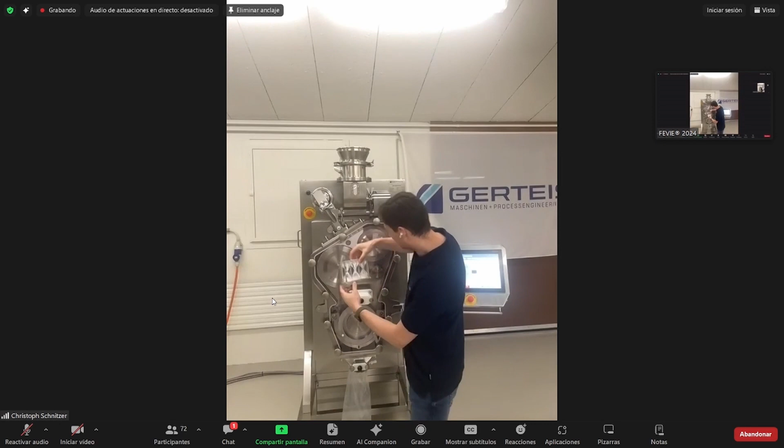I hope you can see it in the camera. I turn it now, I do it two times. So you see here in the middle, this one was going very fast down. This here was slower, and this is not going down at all, or very very badly. And then we come already to the topic, because in this thing here, you see, this is only mixed dry powder, ungranulated, and as you can see, the flowability is not very good. Whereas, and I do it again, in the one in the middle, you see that the flowability is very good because it's a granule, it's not only a dried powder.

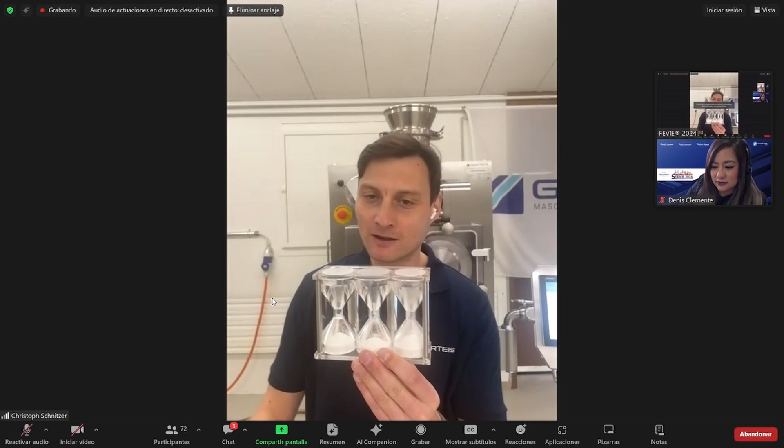And this granule is much better flowing than in the tablet press forms later, and that's why we are doing it. So with our process, you can say we make the homework, or make it easier for the tablet press to produce nice tablets, because we enhance the flowability a lot of this dried powder for solid dosage for tablet making afterwards. So this explains what we are doing.

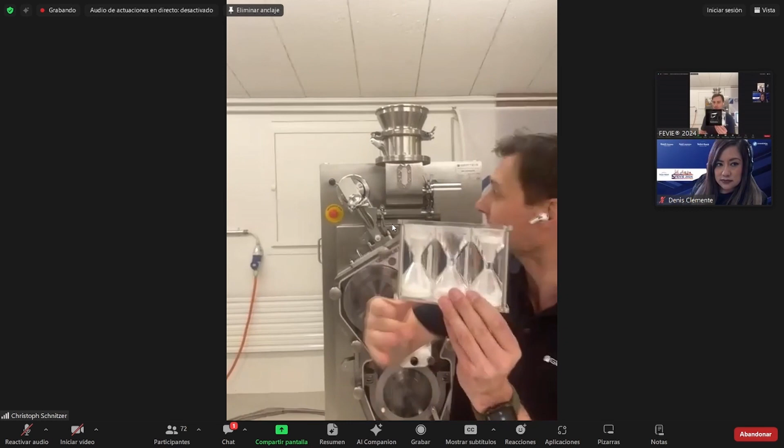The input in our machine is dry, not good flowing powder, and the output will be later the granules, which are flowing well. Now, with this, we come already to the machine itself.

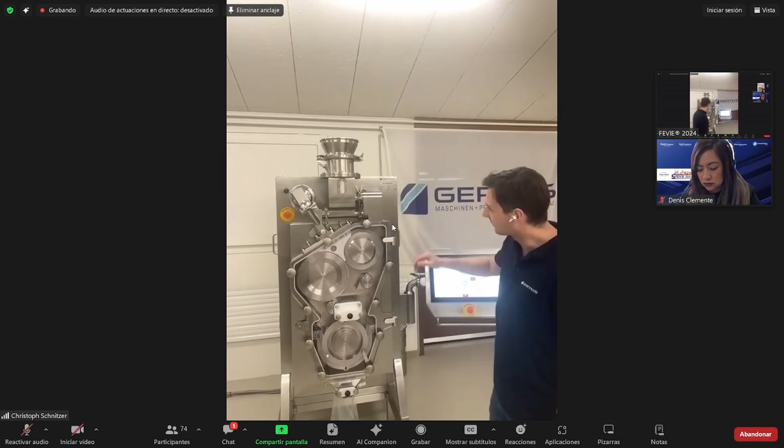This is a typical roller compactor, it's called our Mini Pactor. It's, let's say, small size for smaller batches for research, but also for smaller scale production.

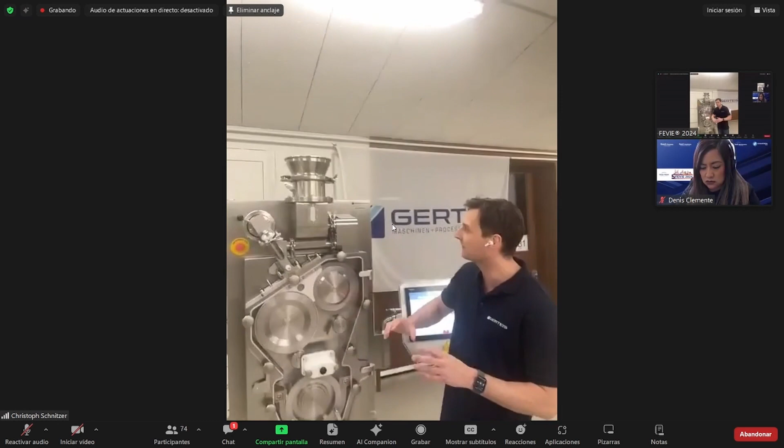So typically, this machine is built up as such. You have the powder inlet, you put in the mixed dry powder into our machine. You do it via IBC or via vacuum transfer system.

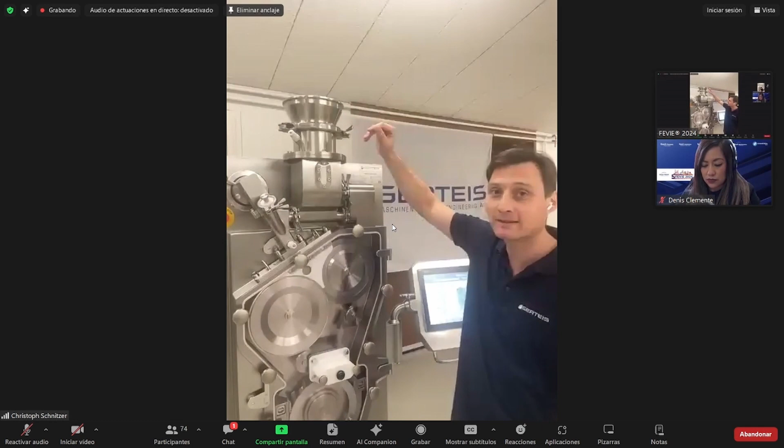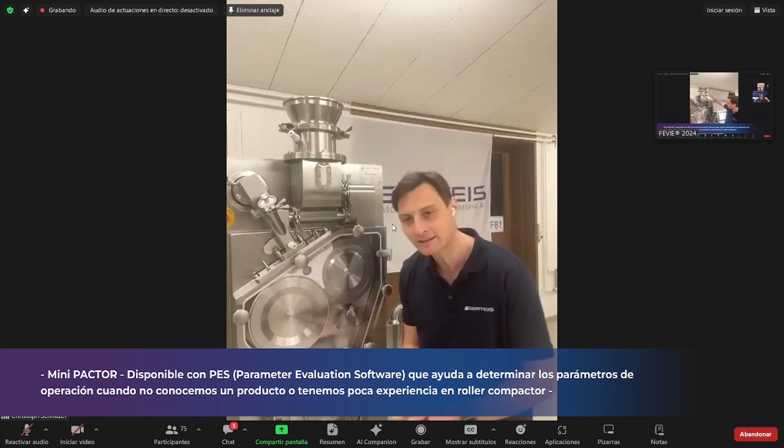Depends on how your system is built up. The powder comes into the machine, and we have an agitator which helps so the powder isn't blocked in the container, preventing blockage and helping the powder fall down. Then we have a screwing system, a feeding and tamping auger, which direct the powder into the compaction area. The main process of our machine is the compaction between the rollers.

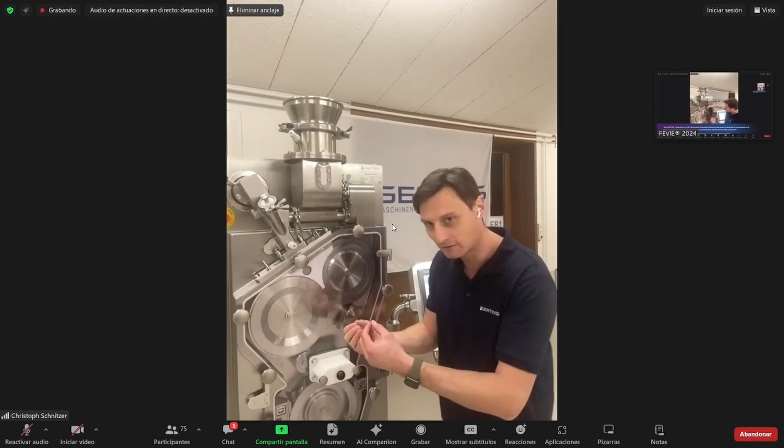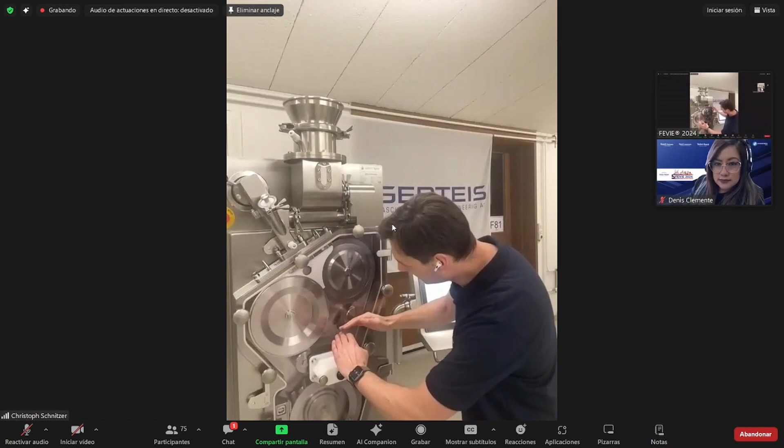That's where we make the quality of the product. So in here we make a ribbon, produced between these rollers. They are turning, you'll see it later in the process. We produce an intermediate product, the ribbon, and then we have an oscillating mill down here, a granulator, which granulates the ribbon into granules.

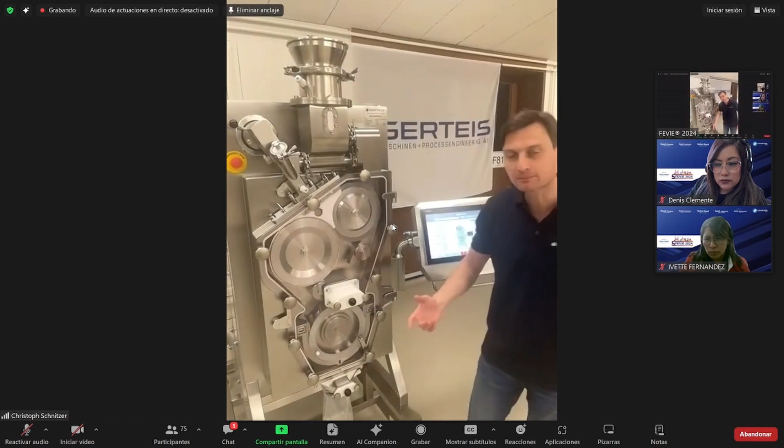Which you later take out of this outlet here. This is the outlet funnel, and from here you can connect the IBC or the vacuum transfer system, depending on your needs. Then you transfer it to the next process step, which is apparently tablet pressing, for example. So that's the general build-up.

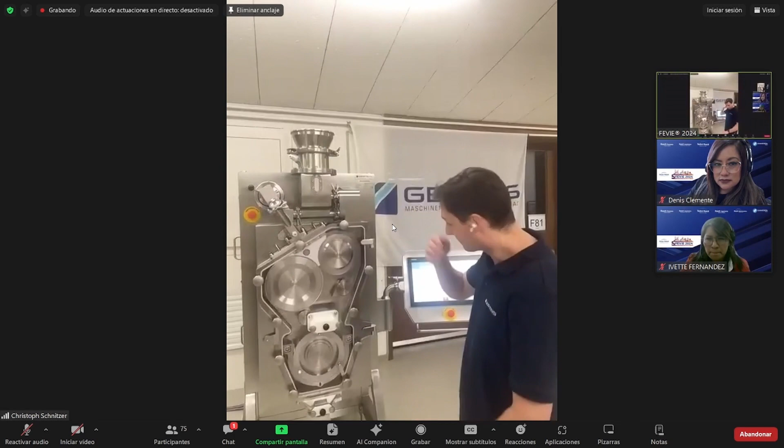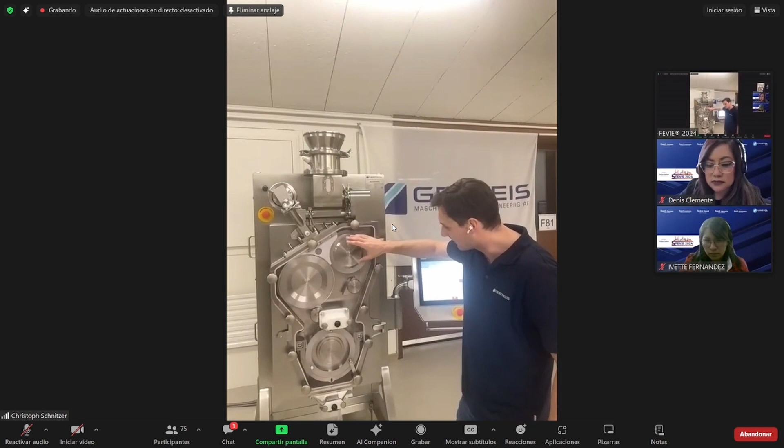So we have two sub-processes. One zone is the compaction, where the compaction of the material is done, the densification. And afterwards we have the second process step, which is the granulation.

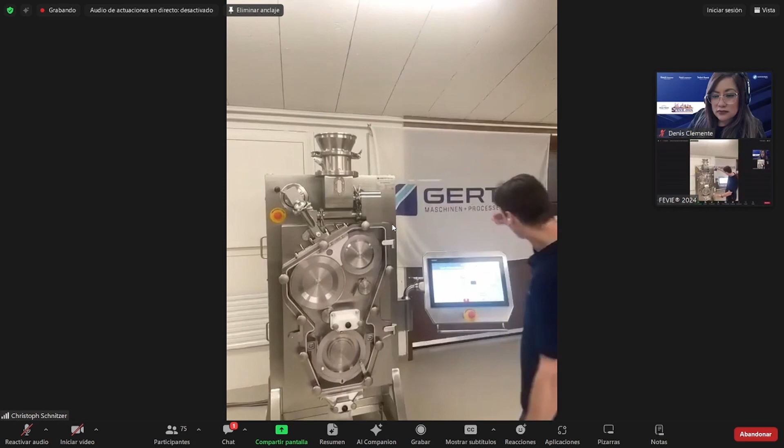So what else is around this machine? We have the process housing here, which is this size. And of course we also need an HMI to control the process, to change parameters, to control this process simply.

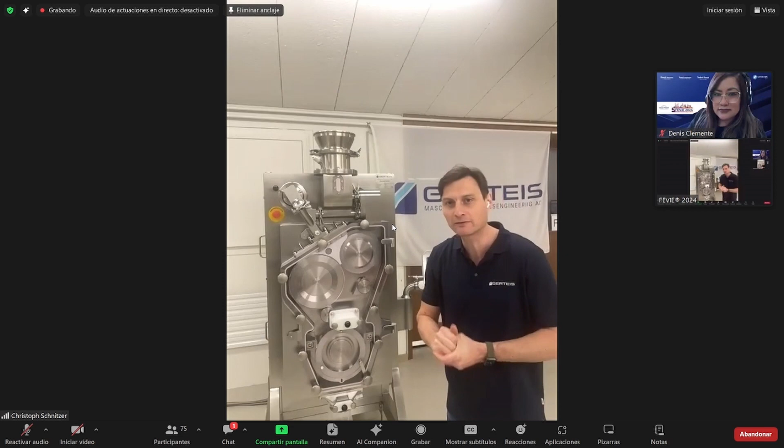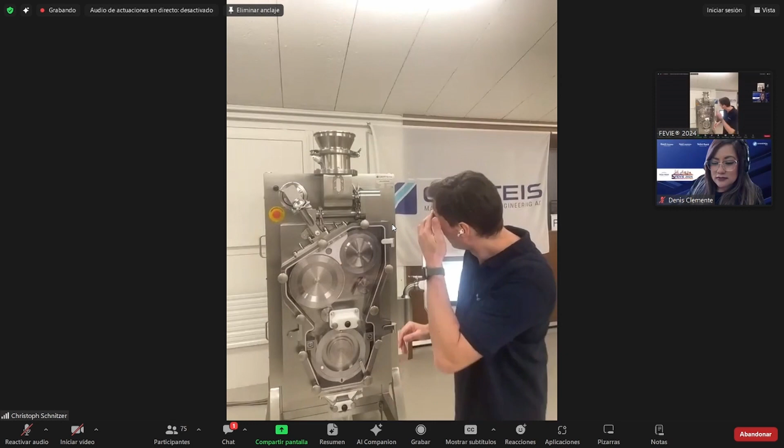And of course here you can also change the main parameters. Let me explain a bit more. What are the main parameters for our machine? Of course, you can adjust the press force between the rollers. The higher you increase the press force, the harder the product gets. You can also adjust the gap between the rollers, which also has an influence on the hardness of the product, but also on the output. The bigger the gap you adjust, the more output you will generate.

So this combination of press force and gap determines the characteristics of your powder later - how hard it's densified, how hard the granules are, or if they're a bit softer. So this is all done within this chamber, let's say.

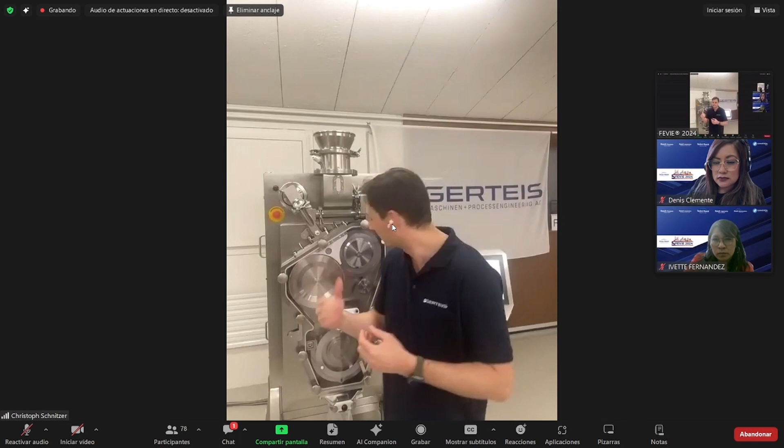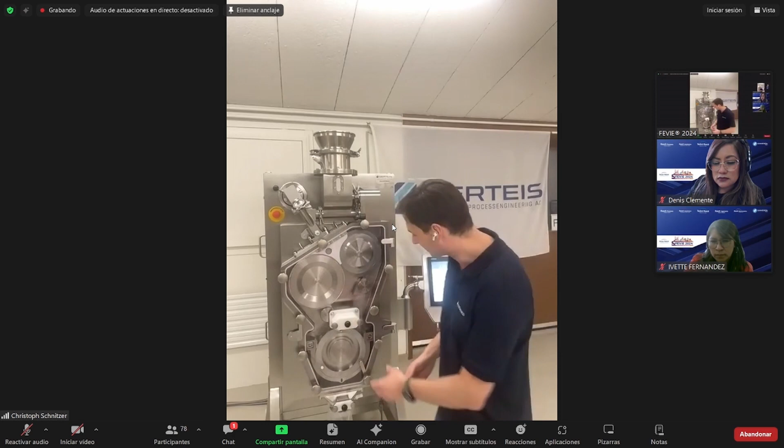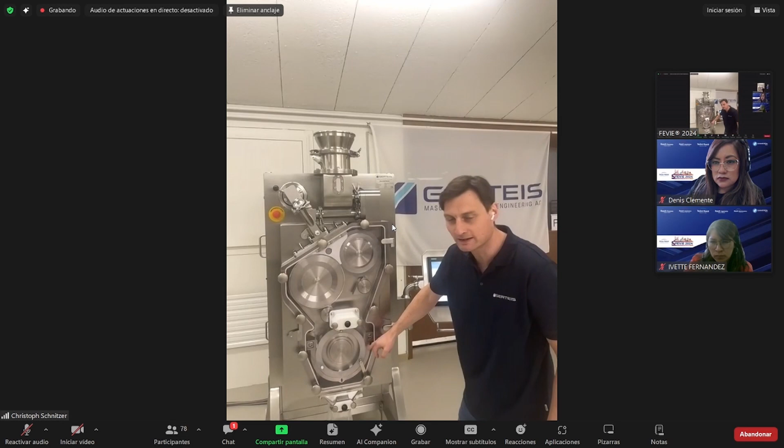Of course, the other process step, which is the granulation, also has some influence on the powder. First of all, we do oscillating granulation here, and in here you can put in different screens. So it depends on the granule size our customers want. We can put in screen sizes from roughly 0.8 to 2 millimeters, depending on what is really needed.

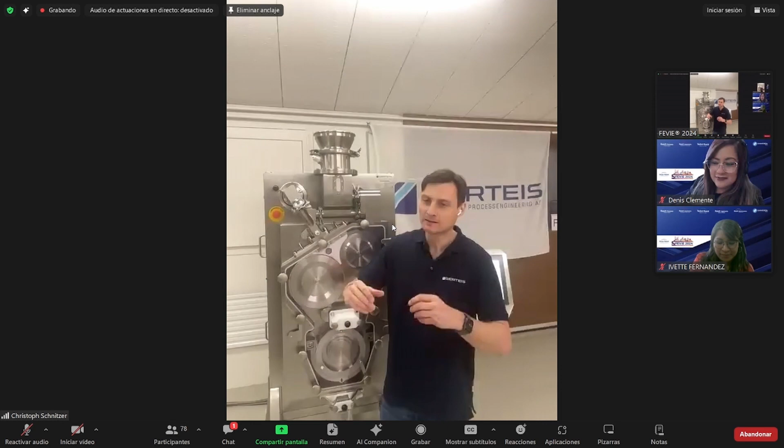As you hear me talking, you have lots of freedom and possibilities to really granulate according to your special needs of the product. And therefore, you need an advanced roller compactor that gives you a big range of parameters and reliable production within the process.

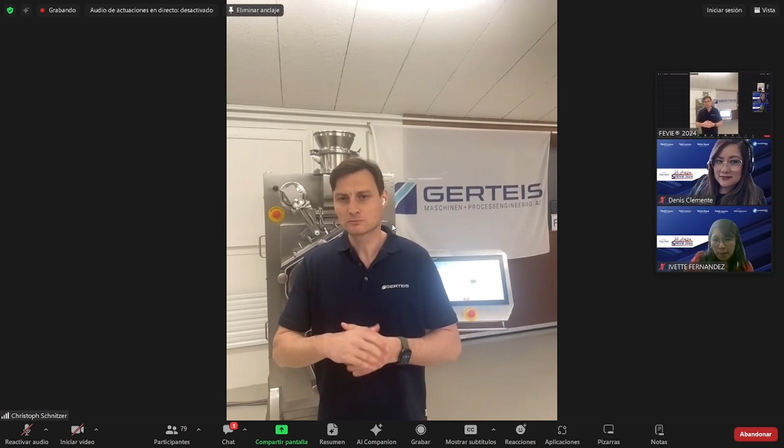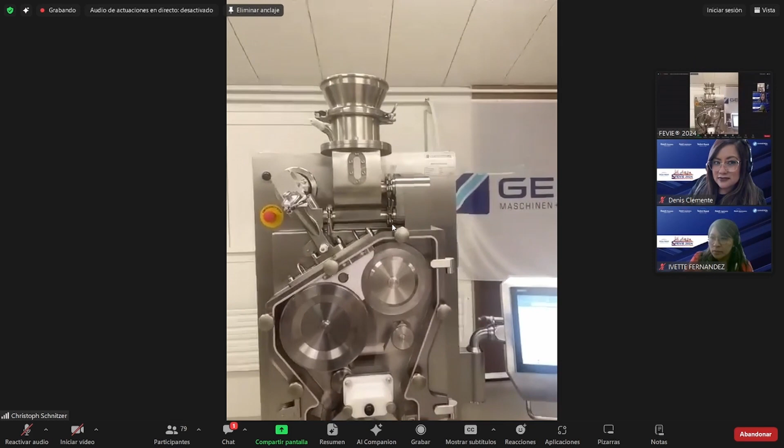So we can then already go to the next step. We will now let the machine run a bit, so that you don't only see it in theory, but also see how it looks with the powder.

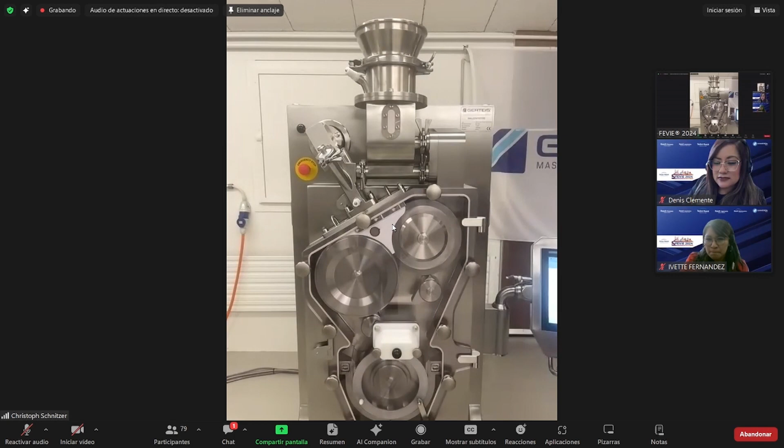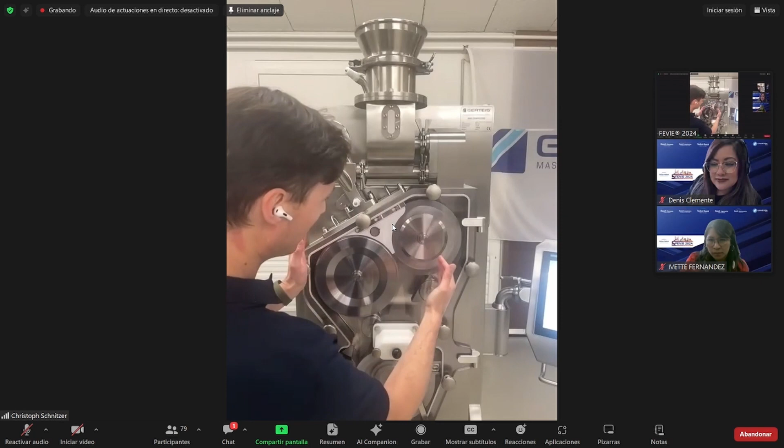The machine needs to start up a bit, but then you will see already the granulator is starting oscillating. Now slowly we fill up here with powder, and via the screw system, feeding and tamping auger, as the process starts, the powder will be transferred between the rollers, which is the compaction zone. Then you can focus on this point soon.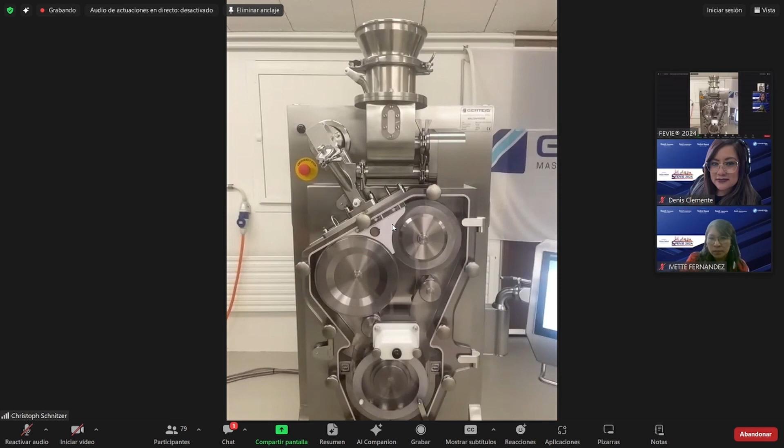There you will see that the powder comes out as a ribbon. It's a compacted ribbon which comes out here soon.

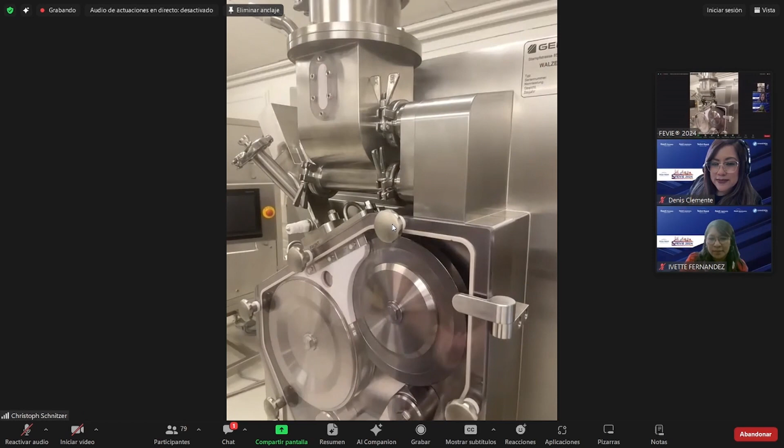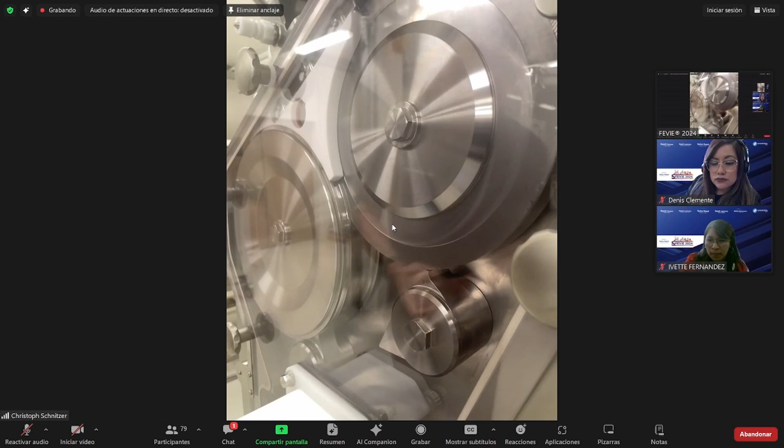Maybe it's not so good visible for you on the cameras, but the rollers are turning slowly. I don't know if you see it clearly on the screen, but we see it, and it's turning slowly. Of course, we can also do it faster later, but now we are in the startup phase.

Now you should see that the rollers are increasing the speed. It also gets a bit louder now because the granulator works. The granulator is already granulating the ribbons which fall out.

As I said before, we have here the first process, building of ribbons between the rollers. Then these ribbons are falling down. There are some scrapers that help direct them to the granulator.

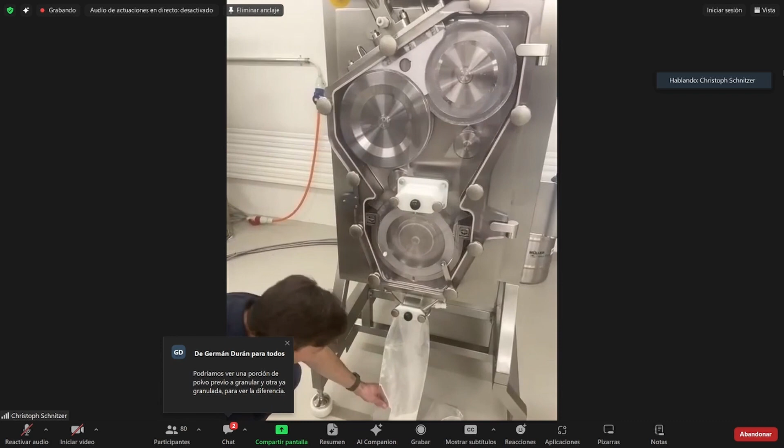If we go down a bit, we will see that the granulator is already oscillating back and forth. After the granules are milled down, here it's only falling into a bag, but of course the granules fall out and we have the first granules produced in this bag.

What we also want to show you, so that you have a better idea of the intermediate product, is we make some samples now with some ribbon samples.

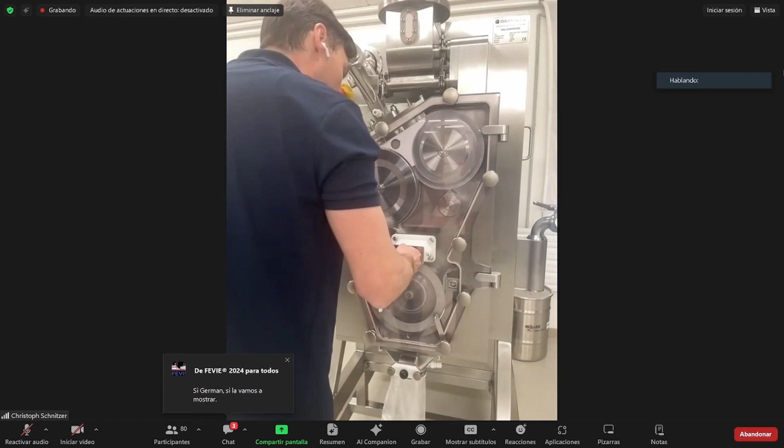Now we are really having this very soft material because we started with some low press forces. But as you can see here, this is the pre-product, the flakes or the ribbons we produced in the first process steps. This can be made harder or softer depending on the parameters we set.

So for you to understand, this is the ribbon, how it comes out of the compaction zone. Now my colleague also shows you the samples of the granules, how they look after granulation.

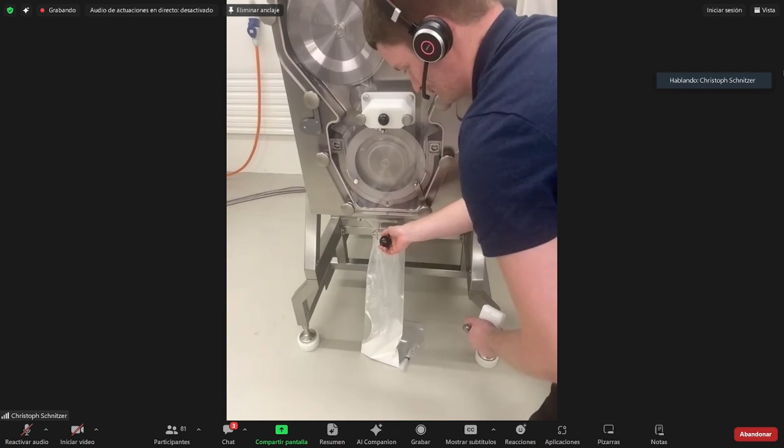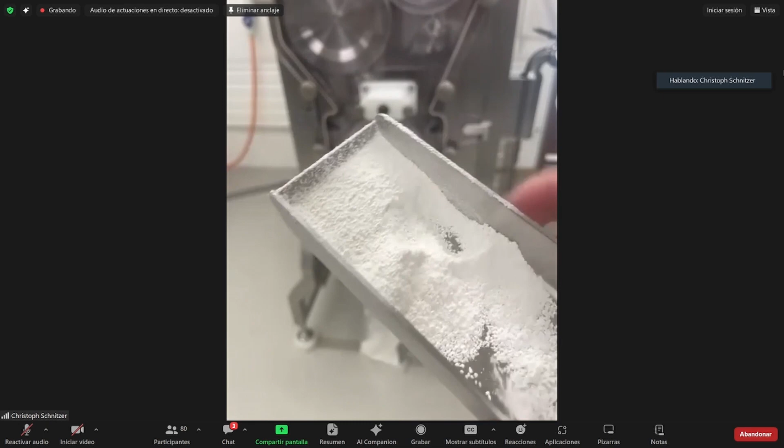Here is the final product, the granules, how it's transferred to the tablet press. This is not powder, this is granules. And it's very good flowing. The flowability is much improved compared to the powder we put into the machine.

So we stop the machine for a moment.

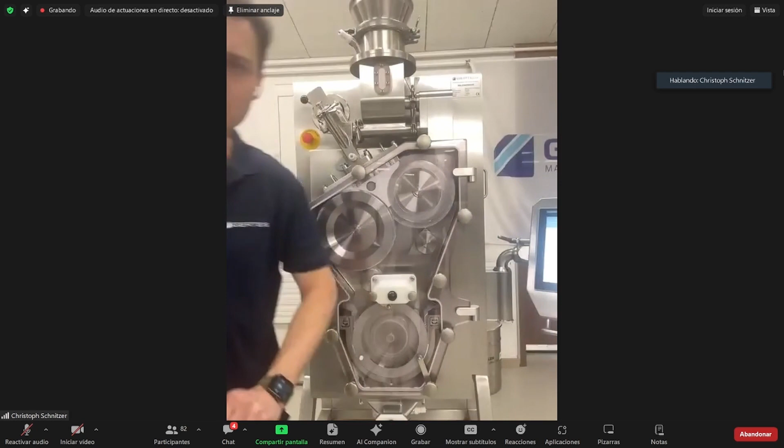You will now maybe say, okay, there are some rollers turning, some granules come out, not so spectacular. But I think the spectacular thing is really, you will see it when you work with it, that it really is enhanced.

We saw it in the field, how often companies had problems with not good flowing material. That's why they had to introduce the roller compactor. But the really spectacular thing is the reliability of this machine.

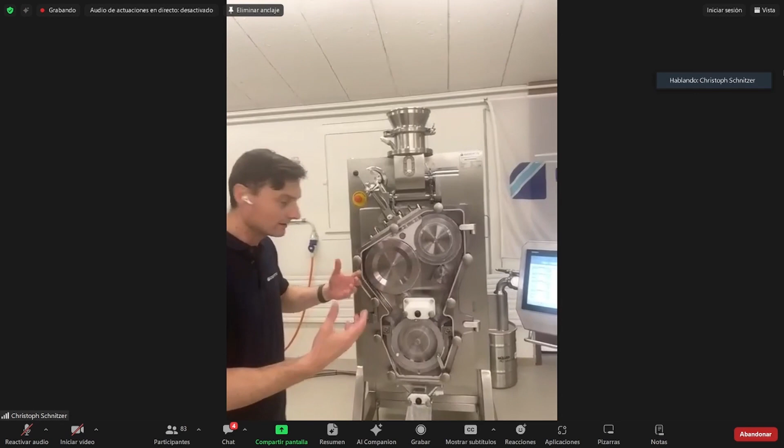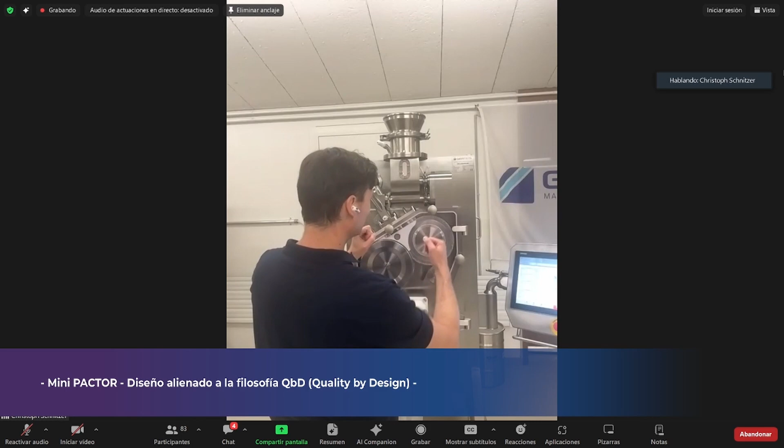And this comes from different factors. First of all, in our Gerteis design, our specialty of the roller compaction machines, we have this specific alignment of the rollers. They are not sitting next to each other, and not sitting on each other, but they are sitting with this kind of angle.

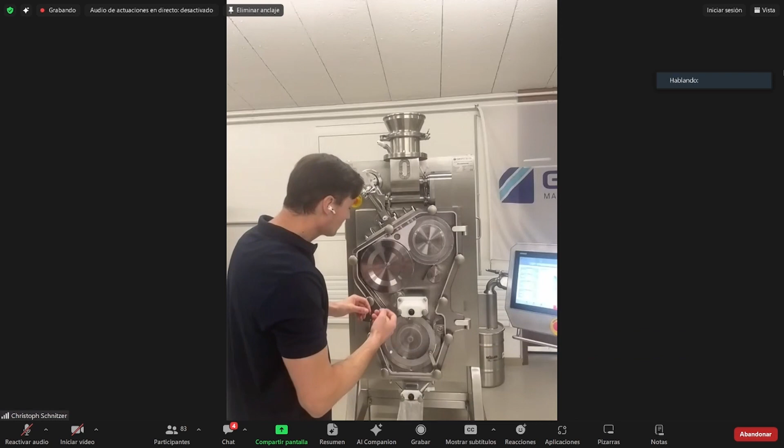And this has advantages, especially in combination with a big diameter of the rollers, because with this effect we can avoid roller cooling. So most of our machines are working without roller cooling, and this saves us.

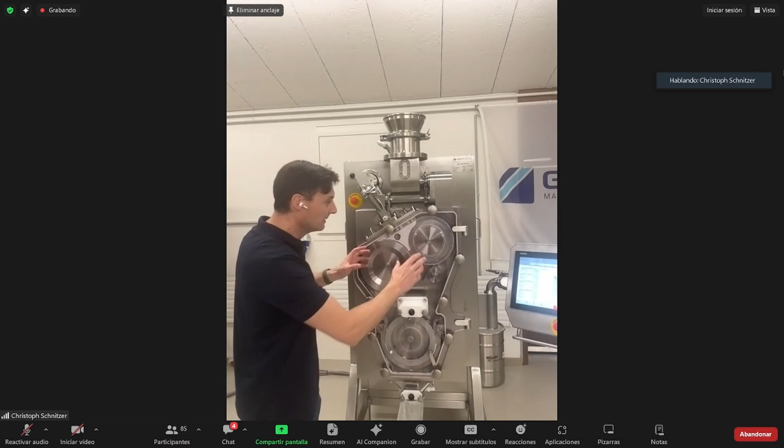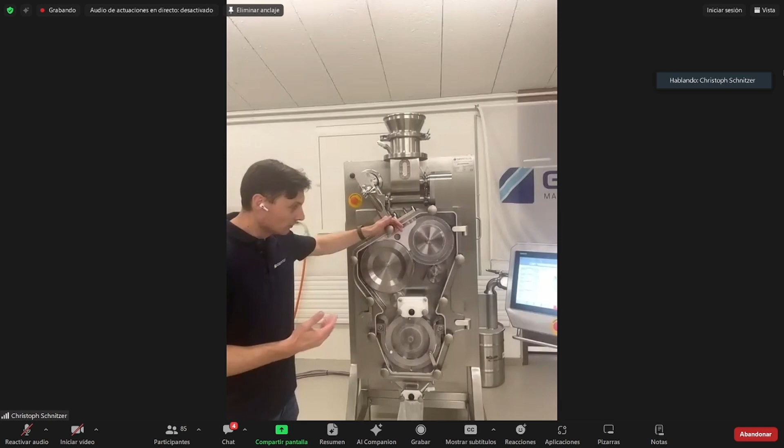Then you don't have to control the cooling process, and this is an advantage. So by design we keep the process simple and smooth. You will also see in the field some people have roller cooling, not a Gerteis machine, but other people have it. But you have to see this not as a feature, but as a countermeasure against heating up of rollers. In our case, the rollers don't heat up, that's why we avoid having roller cooling, which we don't have to control. So this is a key fact for good roller compaction.

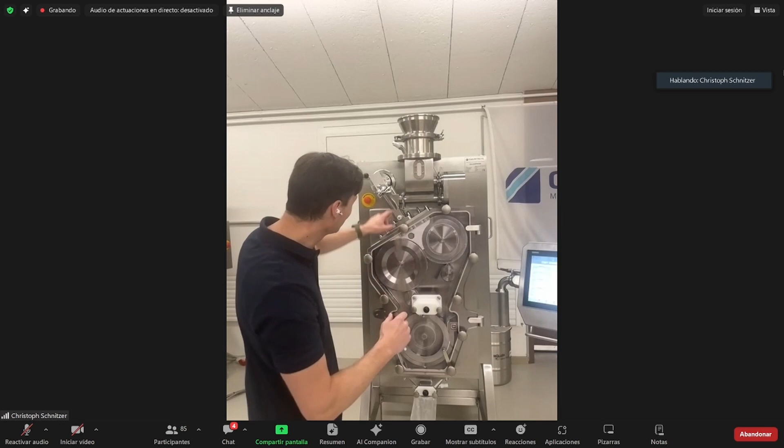Then what we also have in the whole machine is a very good sealing of the compaction zone. It means we don't have any material bypassing uncompacted. So we don't have the problem of uncompacted material rinsing down somewhere, because the sealing is advanced.

And this in turn saves us from having recirculation. You will also see in the field other companies offer recirculation systems which recirculate the uncompacted fines back to the inlet of the machine.

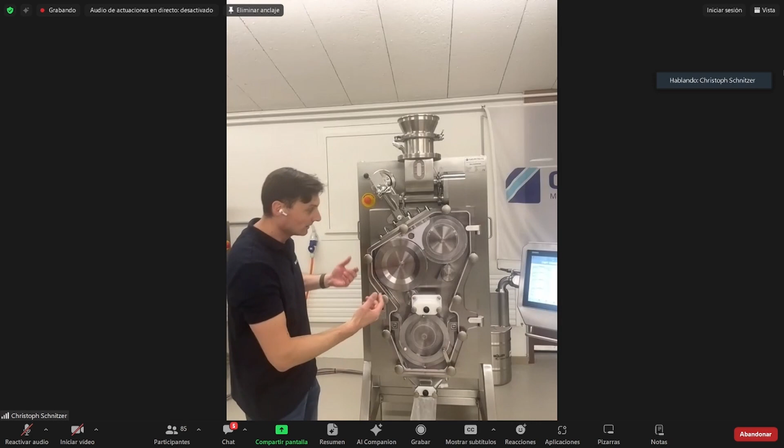But this you also want to avoid, because you cannot control how often the material was recirculated. This has influences on the powder, it warms it up. It changes the characteristics and maybe also the color. You can even see it visually how the powder changes with recirculation.

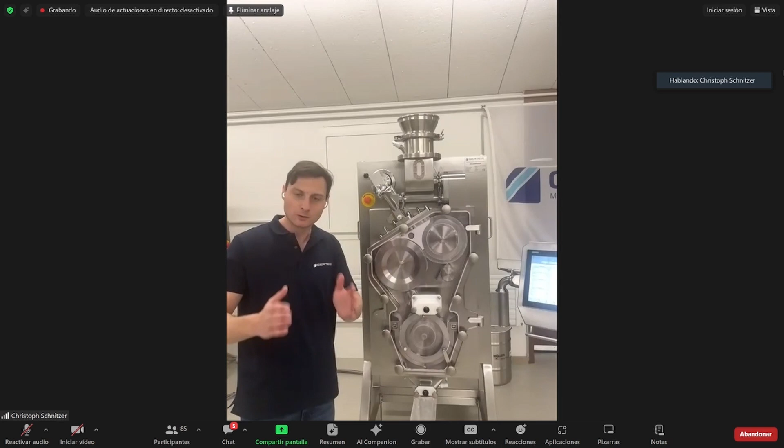So our approach is really about sealing the machine well, so that we avoid recirculation. We do one roller compaction process, but a good one.

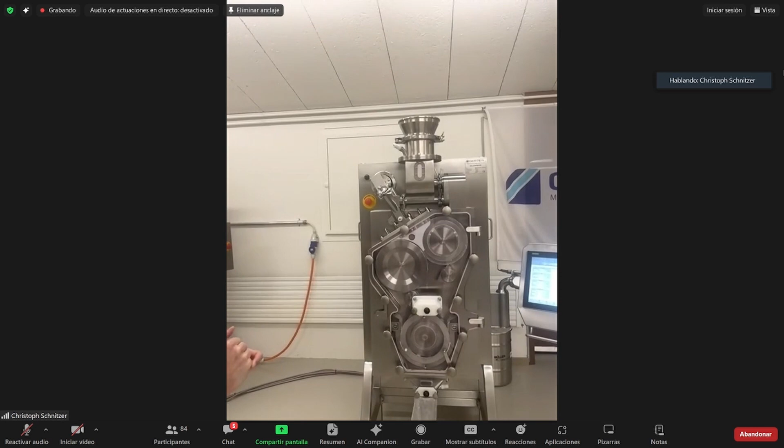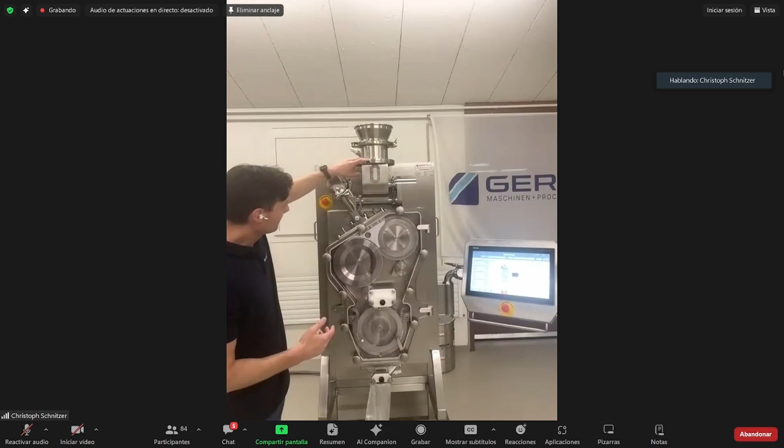So these are really the key factors to consider. Also important, we have a gap control here. We have a gap between the rollers, but we know that the powder is not flowing very well. We know this, because sometimes it's sticky, sometimes there are other problems. So it's not always flowing constantly, your dry powder. That's why the powder which comes to our compaction zone is not always stable and not always the same amount.

But you set a certain gap between the rollers and you set a certain press force. With this setting, the machine itself automatically controls that you always keep the gap between the rollers. And if there would be a slight difference or problems with the feeding of the material, if a bit too much or too little material comes because your material is not flowing very well, the machine itself regulates and gives feedback to the auger system to feed more or less material, so that you can really keep the set value of the gap.

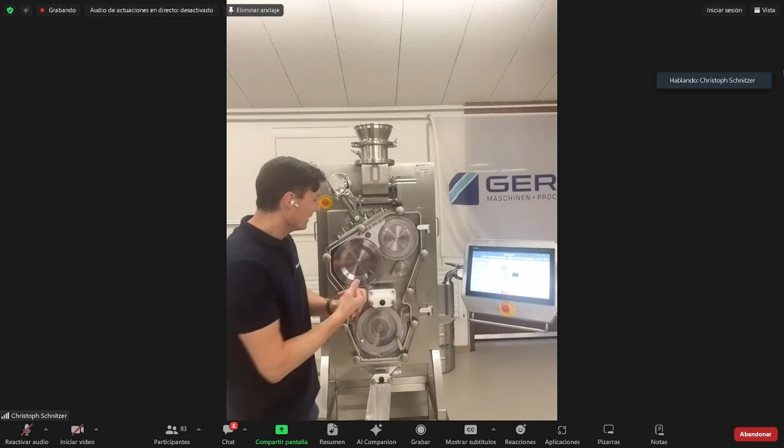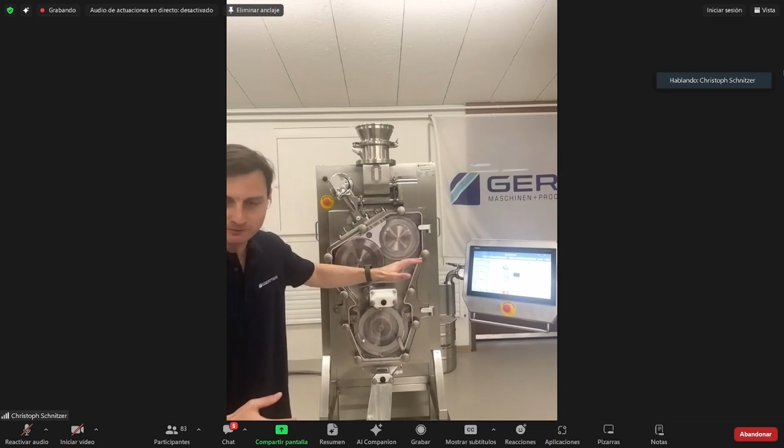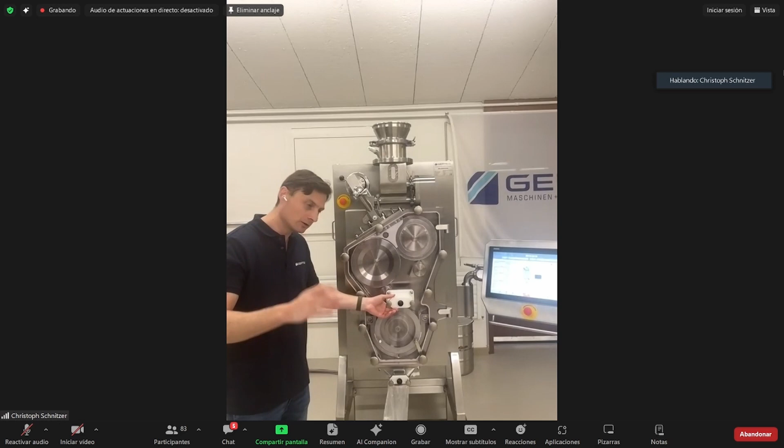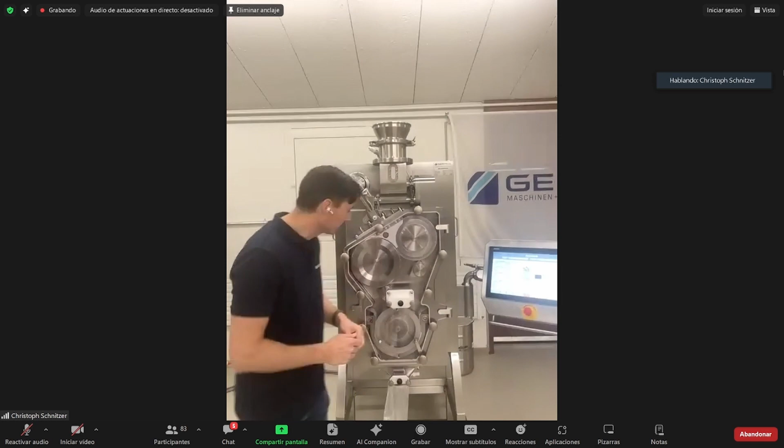And since we have a stable press force due to hydraulic pressure, we can say we have stable press force. The value you put on the HMI is always applied here. Since we have always the same gap because of the gap control, which is fast reactive and automatically driven, we can say we have constant quality in your ribbons, in your product. Constant press force and constant gap throughout the whole batch. And at the end, you as a producer can say, or make sure, I know what happened on this machine. The whole material, the whole granule, was made with the same parameters. There is no inconsistency anymore. That's what I mean by reliable process.

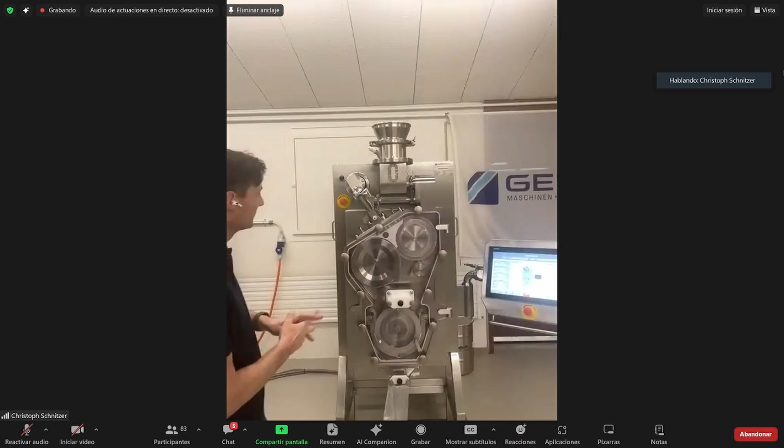So that's an overview of what we have in this machine. Let me sum it up again, so you don't only think there are just some rollers turning. It's important to have a good sealing, a good gap control, and a good alignment of the rollers, so that you don't need any roller cooling and you don't need any recirculation. These are the big influential factors, and also having always the same process parameters, to make sure the quality or characteristics of your granules are always the same.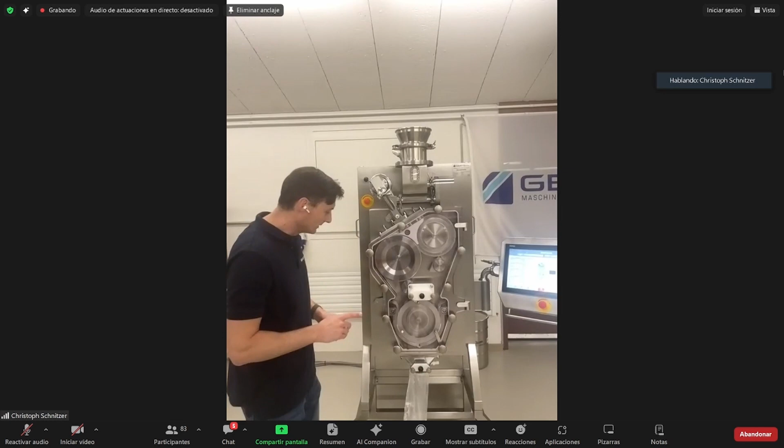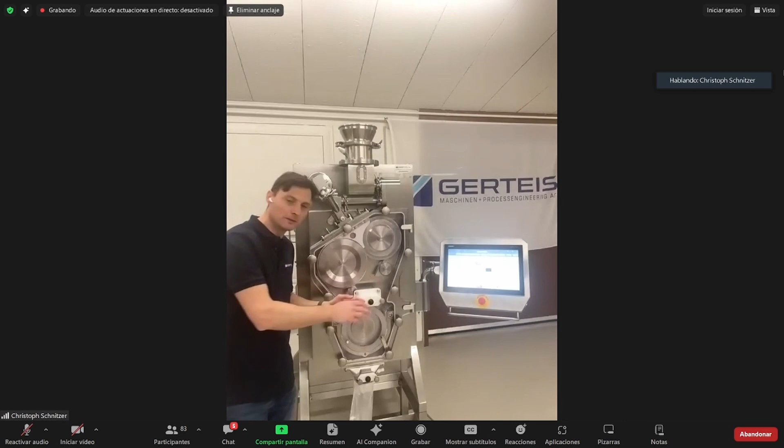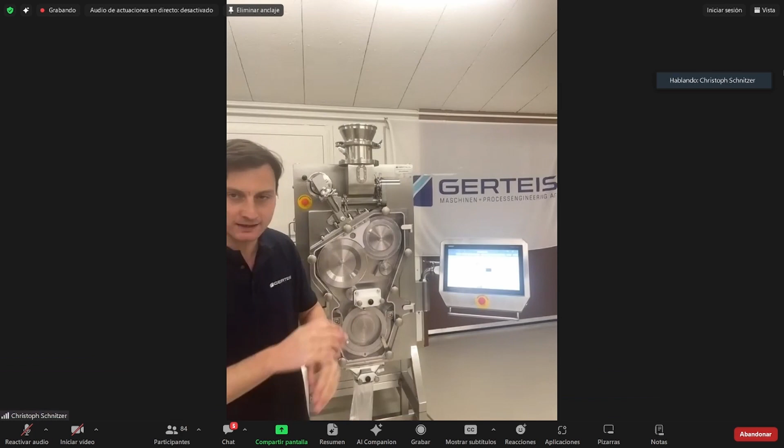But what you can do, since the housing is the same and the diameters of the rollers are the same, we can ensure the scale up from a small machine. So you can develop a recipe on the small machine, and when you want to go to production later, you don't have to be afraid of revalidation, etc., because we make sure that when you have a process setting of parameters on this machine, you can copy it one by one to the big brother, the Macro-Pactor, and simply go forward with the same parameters and just start production without a big validation or ramp up.

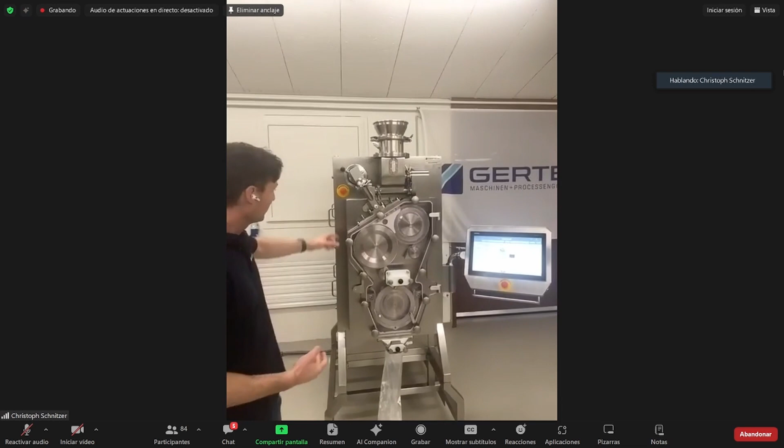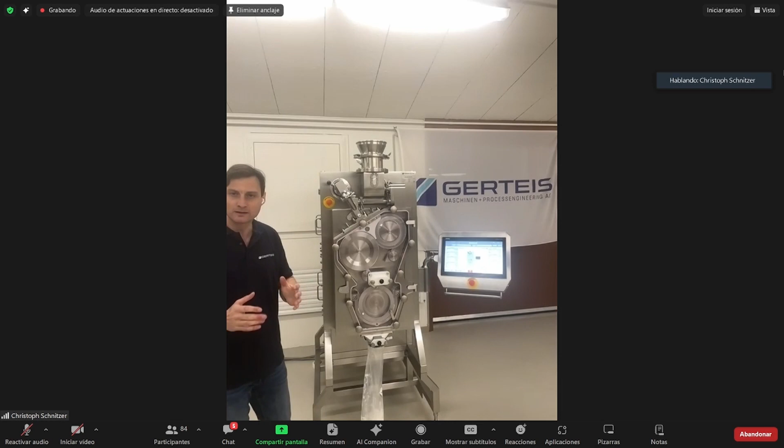What else is possible? Of course, this is only a machine for OEL of 3 microgram, but depending on your needs, if you have, for example, oncology products or dangerous products, we can also build around an isolator if needed, so that we reach higher OEL containment levels. This really depends a bit on what your needs are for OEL, plus also on the cleaning system, we have different concepts.

First of all, this is an example machine without the cleaning options, but we can also have a washing in place here so that you really wet down the whole machine and free it of airborne dust, so there is no danger for the operator. Or if you want it very sophisticated, you can apply a cleaning in place with automatic cleaning of the whole process housing via HMI. So as you see, we have different solutions and features here, really depending on the needs of the customer.

We also have the Polygran, another production machine in between, for an output up to 300 kilogram per hour. It's a robust roller compactor, also from Gerteis. And we have a really small unit, the mini Polygran machine, which has an output up to 45-50 kilogram per hour. So as you see, we're only focusing on roller compaction for pharmaceutical use, and therefore we build different machines in output sizes, in OEL requirements, and also in cleaning concepts. So this is all we do.

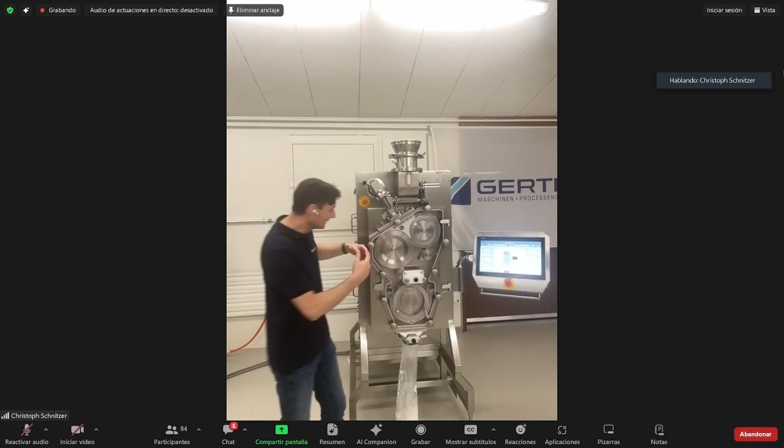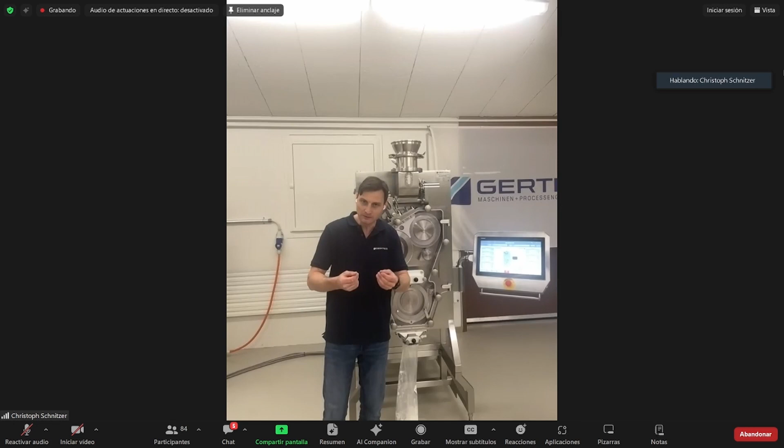I hope you understood a bit what are the different parts in here, what are all these rollers doing, and what is this granulator doing, what is really happening in this machine. So you also saw it on the powder and how it looked like after ribbon building and after granulation. And I hope I could also show you a bit what are the things to take care of and what really makes the success and good granules at the end.

So I hope you enjoyed it, and after Ruben's words, we can also gladly answer other questions of you.

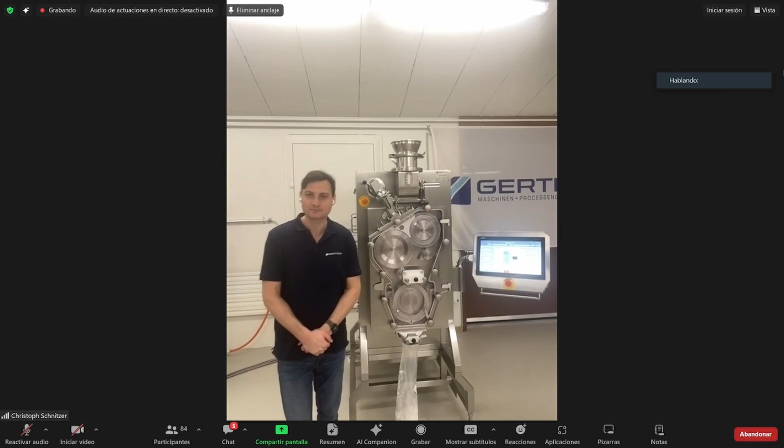And well, now I'm switching to Spanish. I would like to summarize a few key points with the audience, and then we can move to the questions and answers. Thank you very much, Christoph.